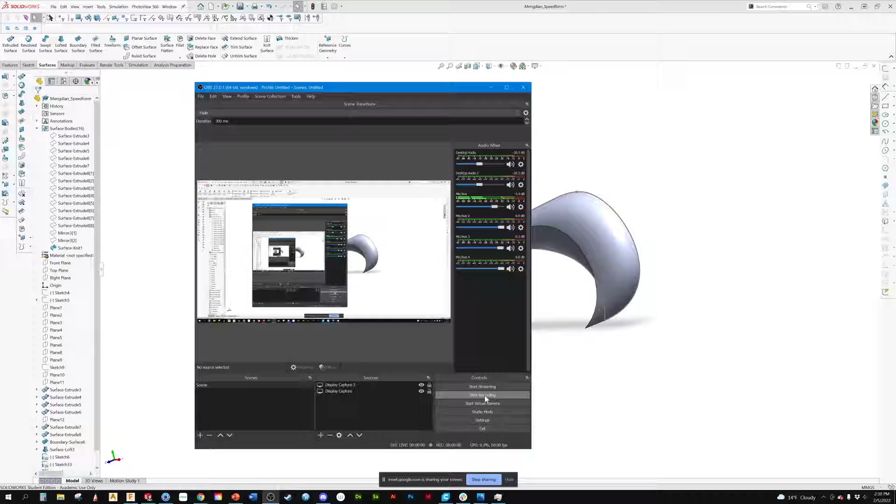There we go. Okay, so now let's mirror this over. There we go. Oh, did I stitch it when I mirrored it?

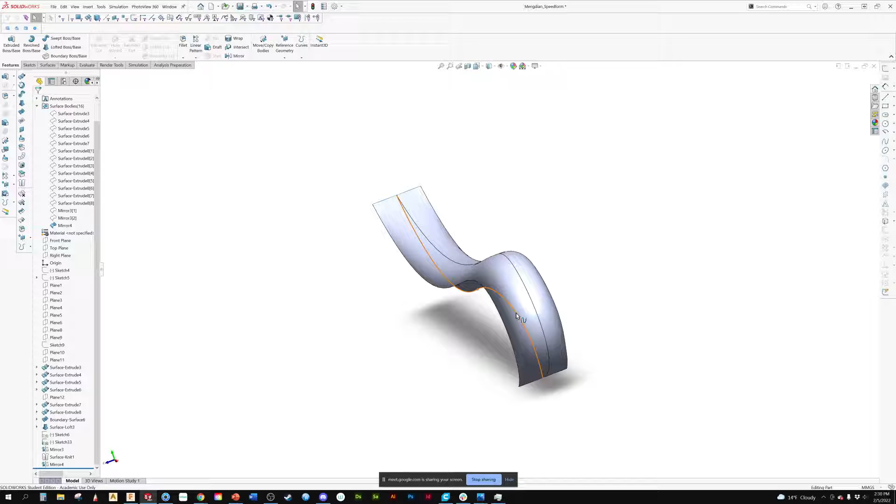Okay, let's hide this sketch. Let me just check to make sure something here.

Okay, so when we evaluate these, let me just go back to your mural board here.

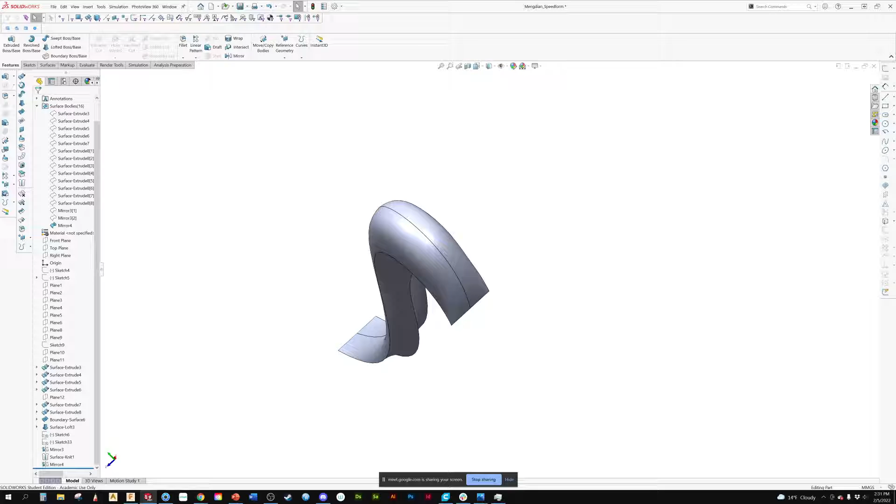So I'm going to ask you some questions of, did you want this? Is this what you expected? Okay, I think... well, no, let me go through the model first. That's what I'm going to do, is ask you some questions about that.

So first I'm going to just quickly hop into KeyShot, which I saw that you did, to kind of get a better understanding of the highlights. Let me put my glasses on here.

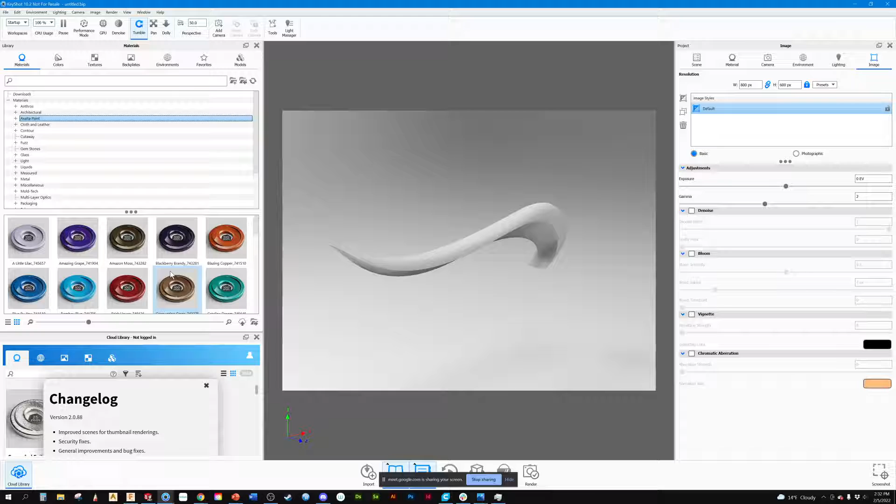Okay, so the very first thing I see, Megan, is that you did not set it up so that there's continuity. There's no tangency here. Did you notice that?

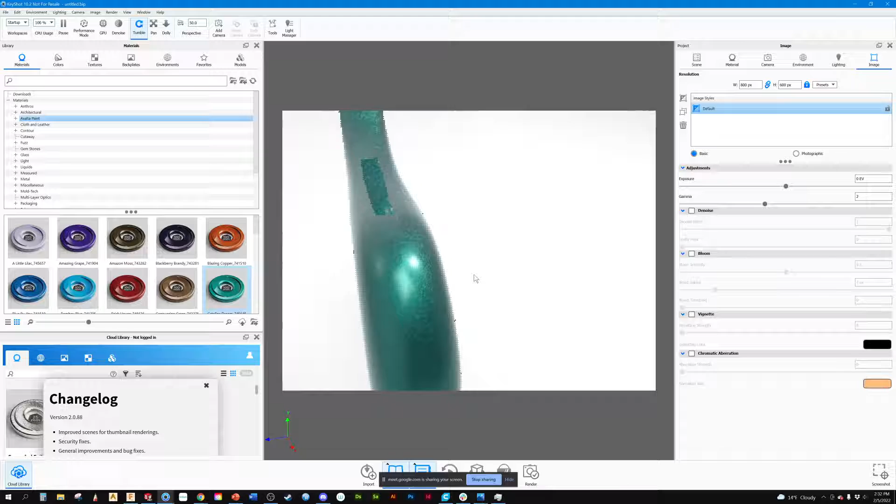No, because I didn't see that. Okay, so one of the first things that we talked about in the classes and even in the last video -- did you watch those two videos I sent? Yes. Okay, the advanced videos? Yep. So this is where attention to detail has to come in place, Megan.

You know, when you do modeling, you're missing that attention to detail. Yep. And the attention to detail comes in this.

So have you set yourself up with a tutor again? No, because I didn't find one. Okay, you've got to get a tutor set up or someone in class. If this continues, you're going to risk not getting a passing grade or getting the grades that you need.

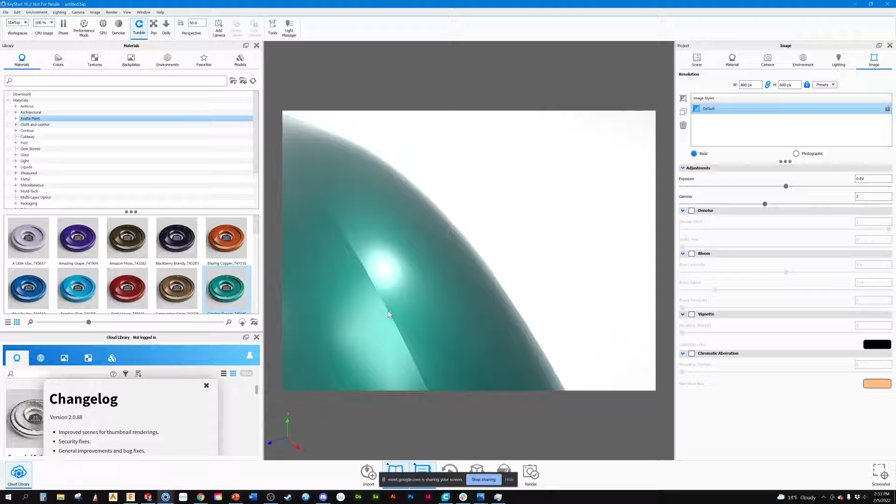Okay, so because I'm not going to harp on it too much, but from everything that we've taught, this is unacceptable. To ask me for help and not know that this was a problem means that you're not getting the information or you're not absorbing the learnings.

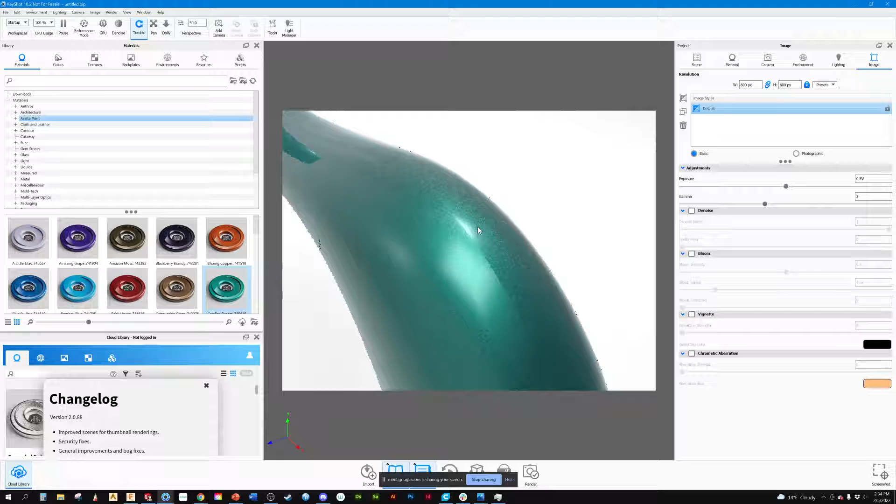Okay, so next, and we'll walk through some of how to fix this too, potentially. So now next, my question is, so hold on one second, so we don't have tangency up top, which we know. Is it just up the top area?

So it gets better towards the back, but you can still see it. Now, was your expectation that you would have a hard edge along the center here? Do you see what I'm talking about?

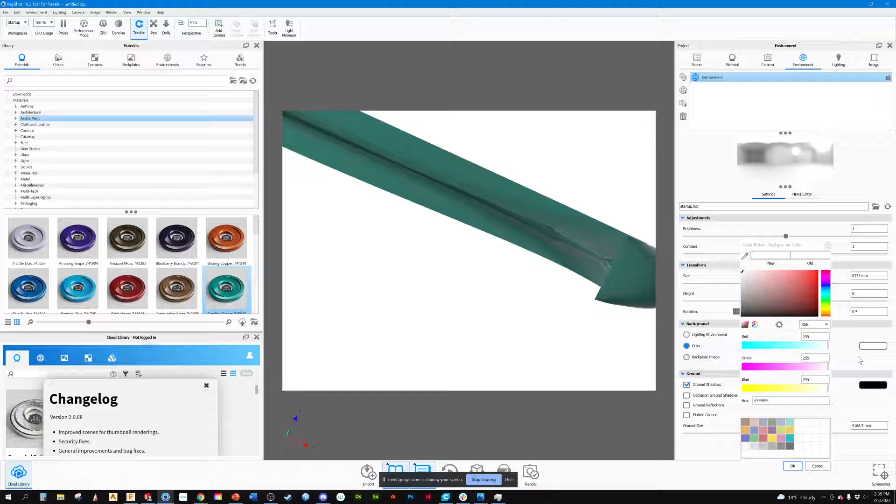Let me just go, I'm just going to change the background here. So that's a question I'm having for you, Megan. Did you want that kind of like razor edge? Was that what you were looking for?

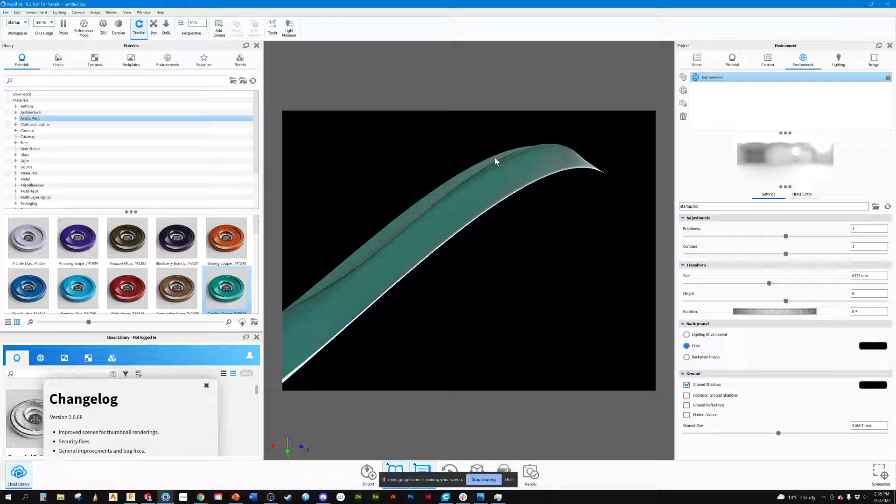So for -- wait, hang on. So I'm using two computers right now.

So for this one, it's like a mirror view, and what I want to do is just one side without the mirrors.

I'm not sure what you mean. So like for this one, you have the mirror view, and then for my final, I kind of want just the one side of the model, like the one I sent you. So you only want it as half?

Yeah. So that's not the assignment. It's got to be a full model, and it's got to be both halves. You know, because this, what you've got here...

And I would suggest that you be writing notes down. If I'm saying it needs to be a full model, you should be writing this down, Megan. Okay.

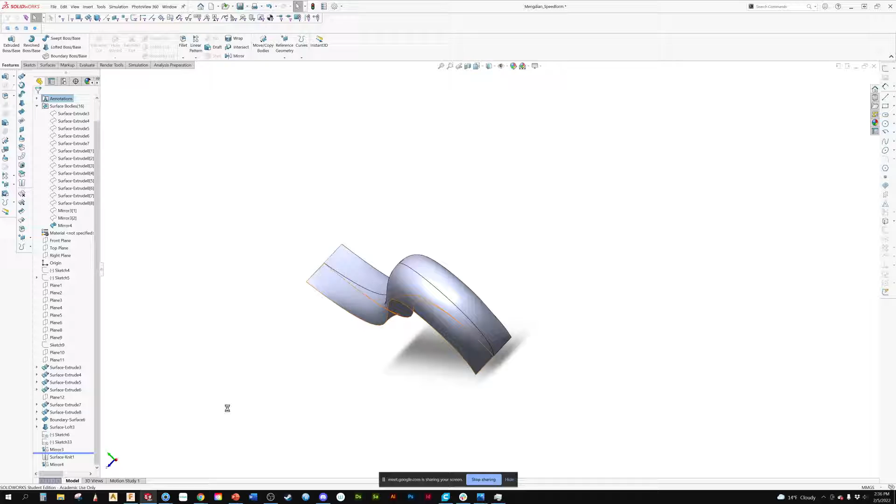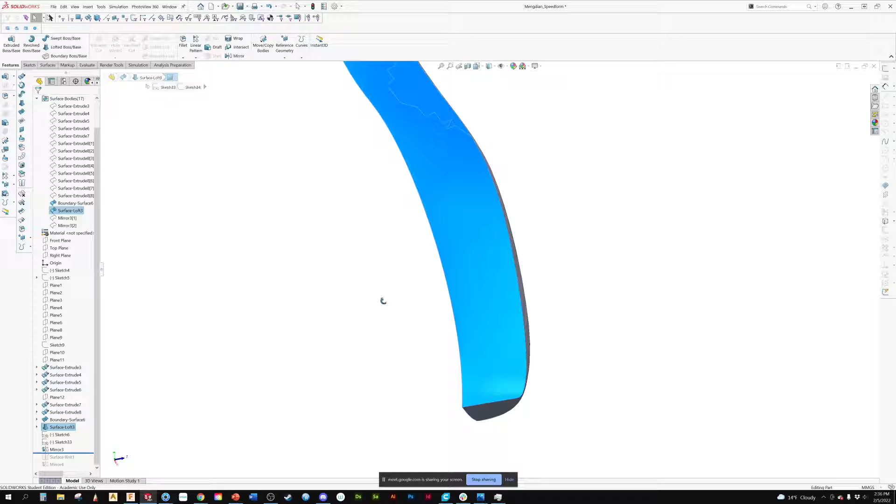Because if I look at this, if you were to submit this, it's not a solid. You can't do anything with this. Okay, so even then, my question is still going to be, see how this -- let me do this here. This will help.

Sorry, let me just find my way again here. Okay.

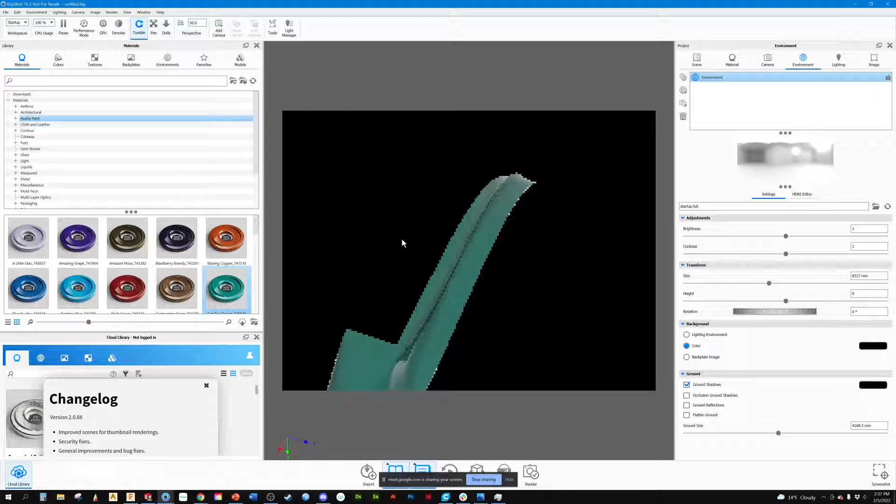So again, here, my question is still, did you want that to come to a flat edge? You know, it's basically, because when you mirror it over, it's a knife edge, which is what we're getting here. So the question is, when you modeled this up, is this what you envisioned? Is this what you expected?

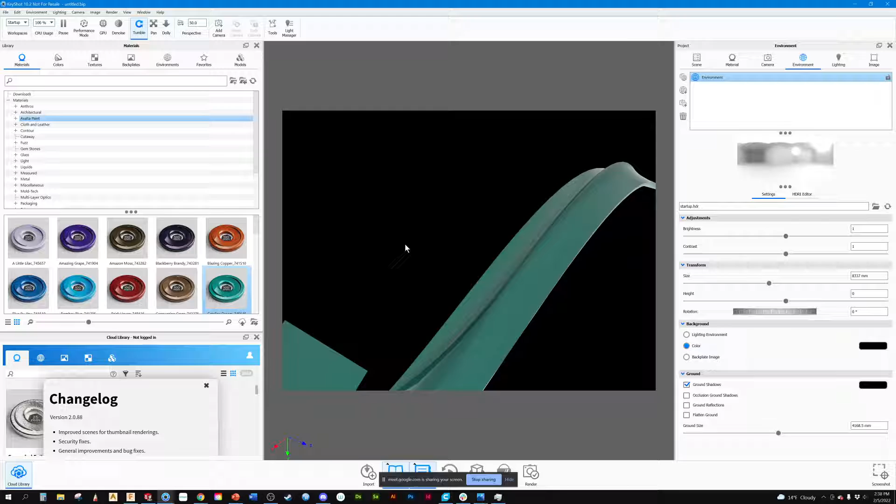Yes, because I don't want the bottom to be tangent. Okay, so that's then perfect. That's what I'm trying to get to. If that's what you want -- without it being tangent and just like a knife edge -- excellent. You know, because those are my questions. I don't know what your vision is.

Because my challenge was going to be if you didn't want that, then that should have been in your notes. Okay. Now you said -- let me just pull this back up here.

Oh, that image hasn't loaded. That's why there's a disconnect between two surfaces. I'm not sure why that's not loading up.

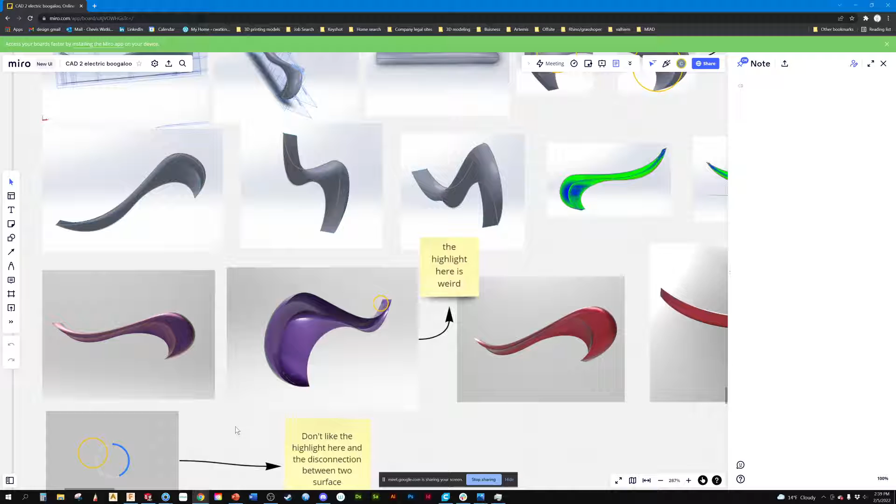So you're saying at the back the highlight is weird. So one of the things is, you know, it's weird, but what do you want it to look like? On the image board you've got to make sure it's something I can clearly see. If I zoom in on here, that's as close as I can zoom, and I can't see the highlight.

When we communicate this, a large part of this is getting everyone to understand how to clearly communicate, because there are going to be times where, as the designer, you may be telling another person who's going to model this up, 'here's your model, Megan, I modeled it up.' Your job is going to be to say, well, hold on, I don't like how this turned out, I'm not liking this highlight. So when I look at this, I'm not sure what highlight you mean.

Do you mean down here? Because I was using different materials, and the highlight I see is kind of different when I use different materials. The different material is not going to change the highlight, or the angle. So that's what I mean.

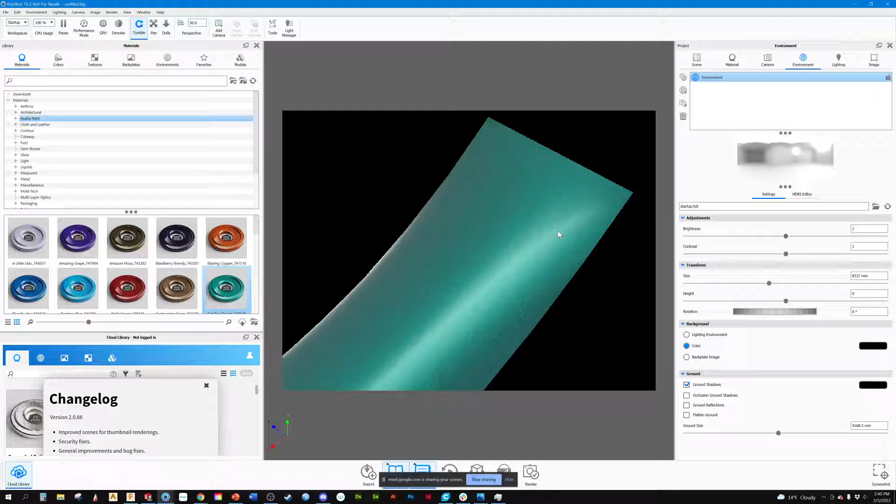You're going to need to send me a picture that shows me, like if it's in this area here, zooming in like that. Okay.

Shoot, I just lost my model. There we go. Zooming in like that, and then saying, you know, I don't like this, and drawing a line over it. Think about what would John do if he doesn't like your sketch. He'd probably draw on it and say it needs to be this, and you need to change that. This is part of this exercise - I know it's hard, but I'm not telling you guys how your form should be. It's for you to determine.

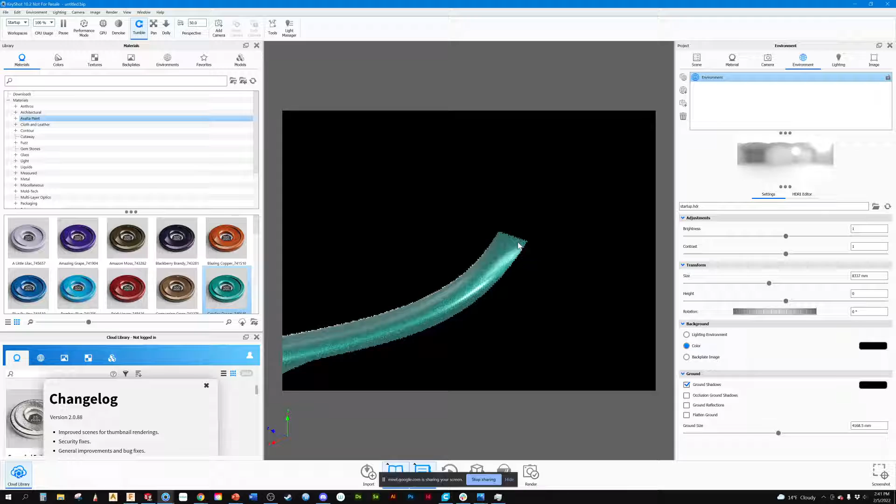Now, if I look at this, I like that highlight there. It comes down, it goes to the ball, and then it rolls back around. A lot of what's going on here is because your surface flattens out. That's why you lose that highlight. That's the natural shape of your surface.

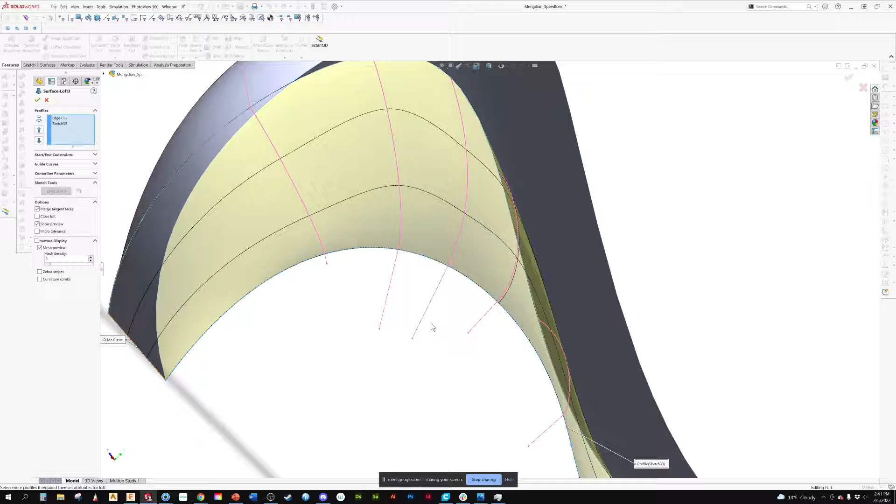So if you wanted this highlight here to go all the way down, this back edge - let's go back to SolidWorks - this back edge would have to have a roundness to it. It can't be perfectly knife sharp. Does that make sense? Yeah, okay.

So if I wanted it to be shaped like this, I could just say like this without changing the shape - this just looks more like my drawing. No, and that's fine.

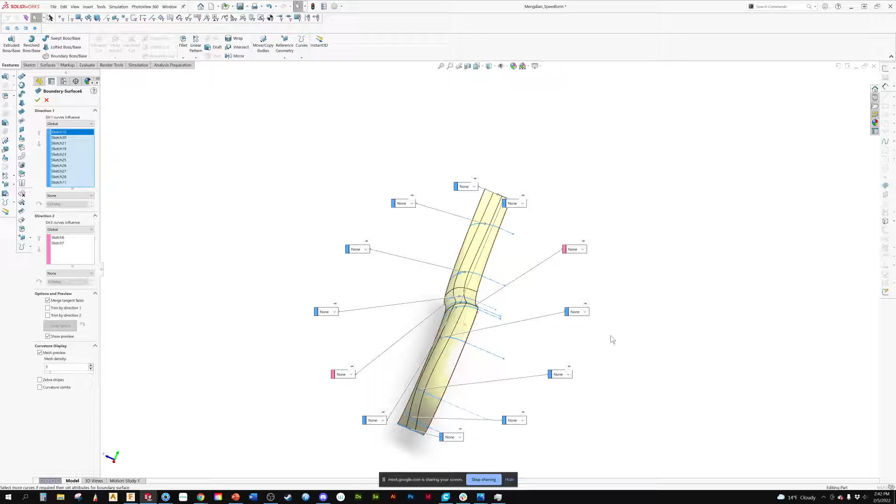It's one of those things - if it looks the way you want, awesome. But then sometimes it's like, but I don't want this highlight to do that. Well, that's the nature of your surface. That's where I was saying it can be tricky, because you can sketch something out and show a highlight on it in your sketch, but that highlight would never be real. That's what you see when you get it into your 3D model.

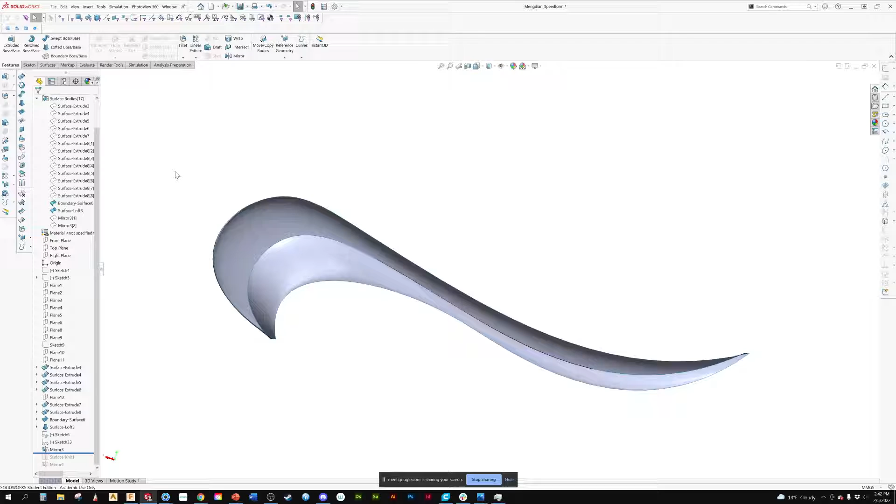So if you're going to want to change highlights down in this area, then what needs to happen is this sharp edge needs to go away. I'm not saying you have to change the highlights - it's up to you to determine, I like the way this looks, and I'm happy with it. Now let's take another look here.

So that highlight is weird. I still can't get this picture to upload for some reason. I think I sent it. Let me see if I can open it. Yeah, try to re-upload it.

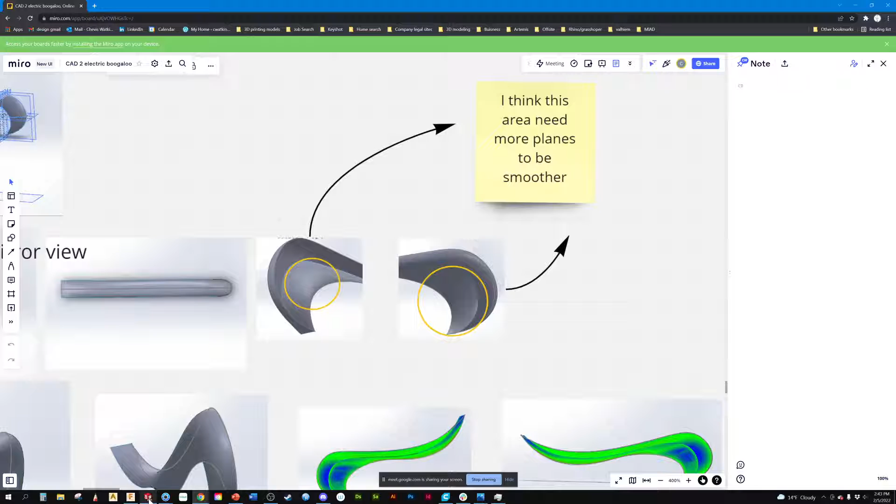Okay, so as you do that, you feel this area needs more planes to be smoother. Okay, so let us take a look at that section. That is at the front, correct? Yeah.

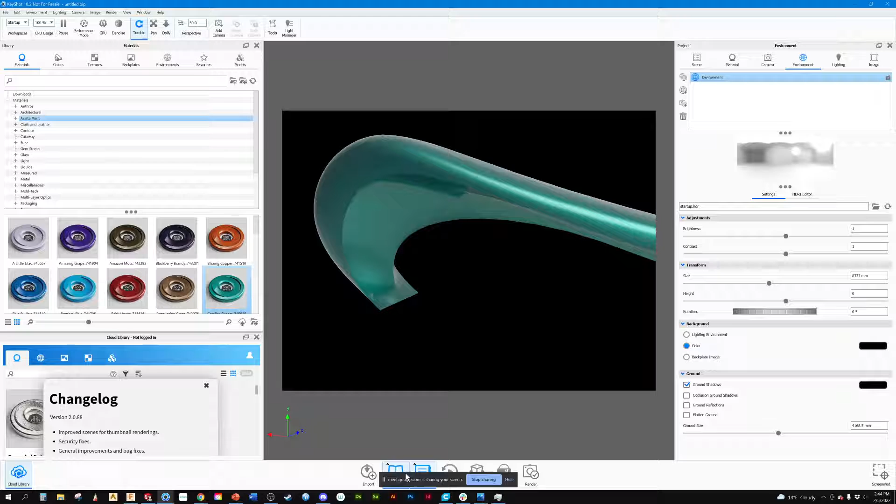So when you say smoother - I'm not, oh hold on, I'm not really seeing any. I'm just trying to see what isn't smooth here that you're not liking.

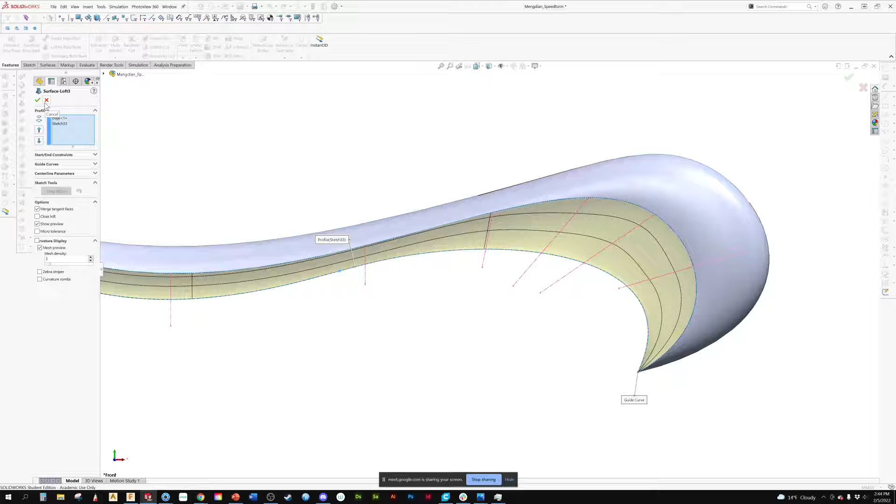Okay, so some of this - it's a good job on how you've started these curves, but some of this, in order to get this smoother, let me come back and find this here.

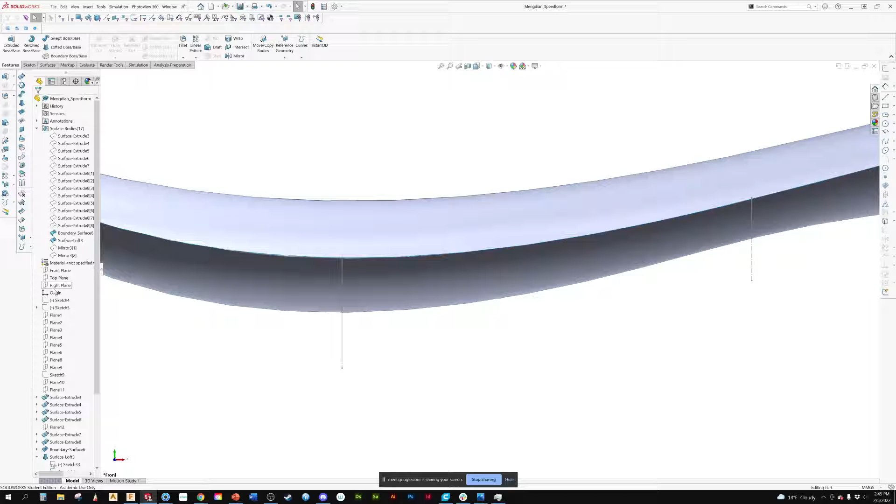So you did a good job of trying to wrap it around. And this one is great because you can see here how that's 90 degrees. Let me, you know what, let me just do this - so you can see how that's 90 degrees to that surface edge.

Okay, so when we do that, these ones aren't. You've got to try to find that middle balance. So even though, like this one here, most definitely, if I come in and edit this...

Okay, so if I was to come in and edit this, let's go to the right plane. What I would want is to try to get these - so if that's where that is, if I try to get that at 90 degrees, that's going to be more like that versus this. That's what's causing a little bit of your problem with the wobbles.

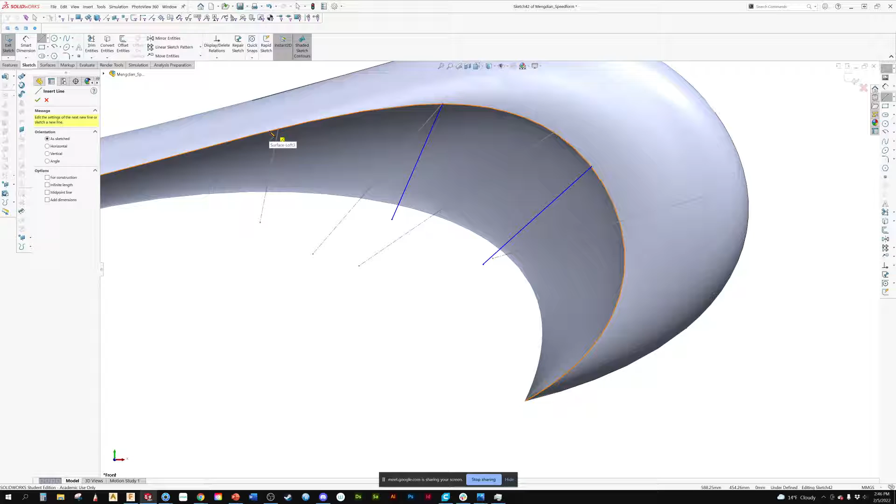Same as that there. You can see in your surface, the further we went around here, the worse things got. And that was because each one of these progressively gets further off alignment. Now this one, maybe we do that.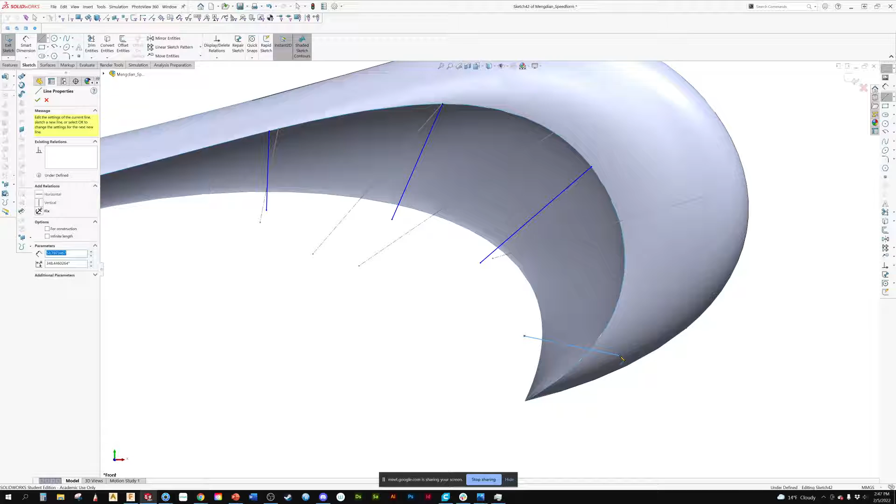So are you seeing what I'm referring to as these go around? These line curves would match that there. Does that make sense? Okay.

So now the next thing too is, and this is where - go back and re-watch the second video I gave you, okay? Because part of the problem is that I don't think - let me just go and see.

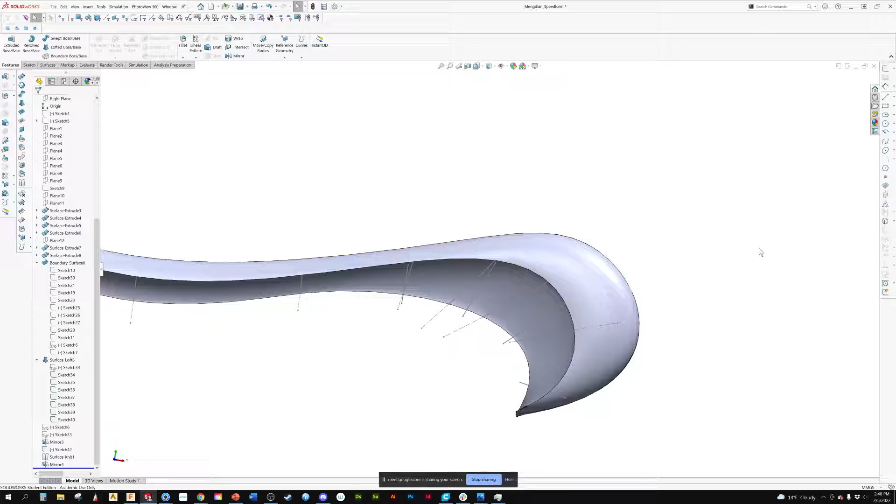When you're building this surface, okay... what happened to everything? There we go, I don't know what happened there. So there's, oh man, why is it doing that? Oh, I know why. No.

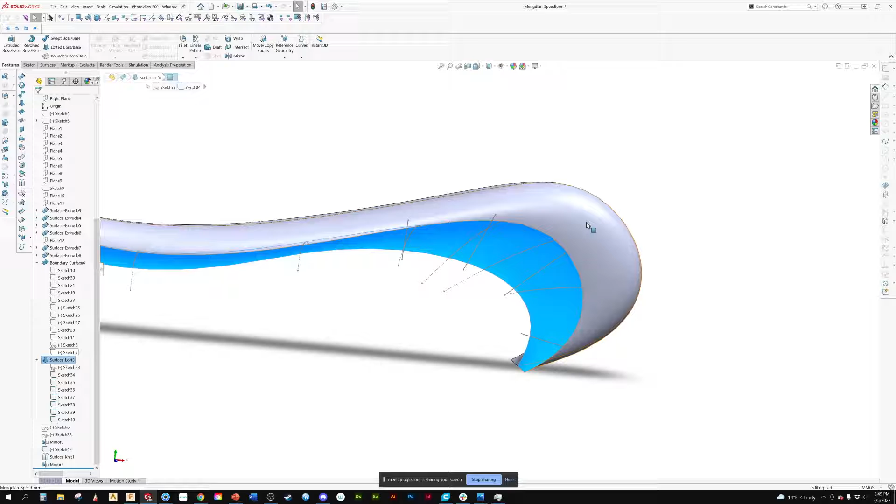So if we look at this surface, the way you built it, you didn't use this surface edge. So in that video, I had mentioned that you want to build off the edges when you can. So that's in the second video. So let me just show you what I mean.

So I'm going to delete this surface. I need to bring back... so yeah, so you did a good job with these. So you can actually just go back and change those lines to get the right angle.

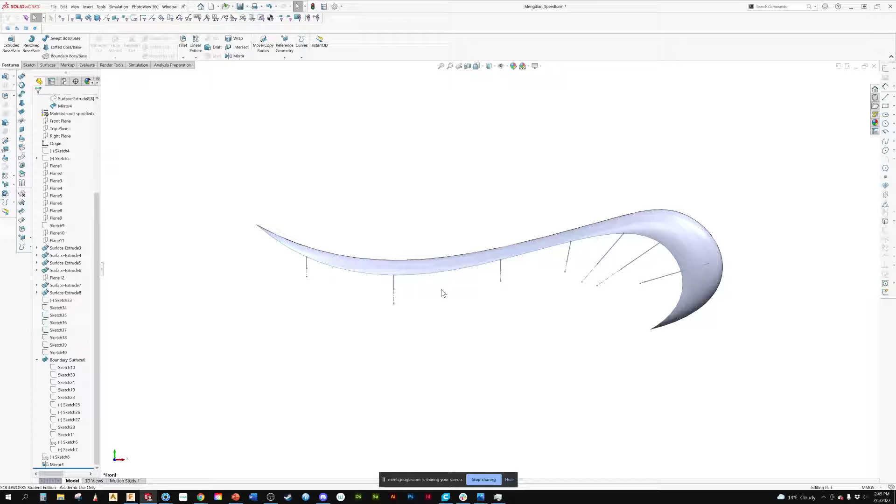I'm trying to find where that first original sketch was. So that's that one. There we go, there's that one. I'm not quite sure what one is the right one here, Megan.

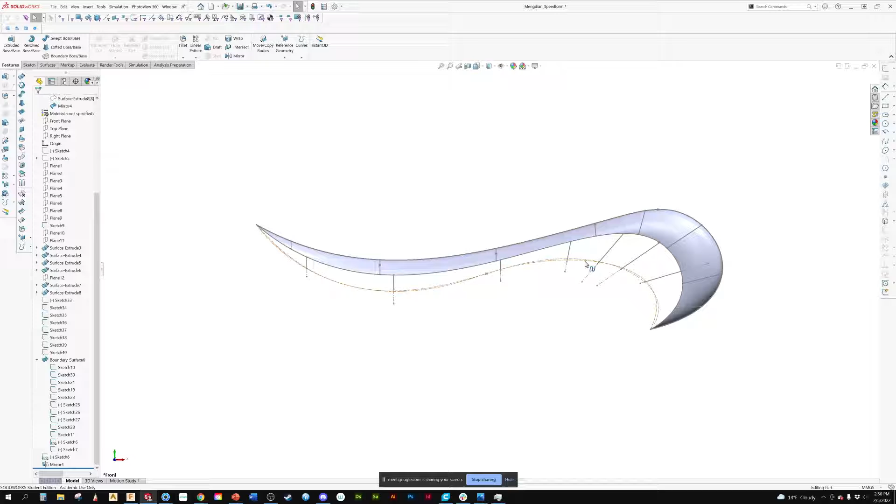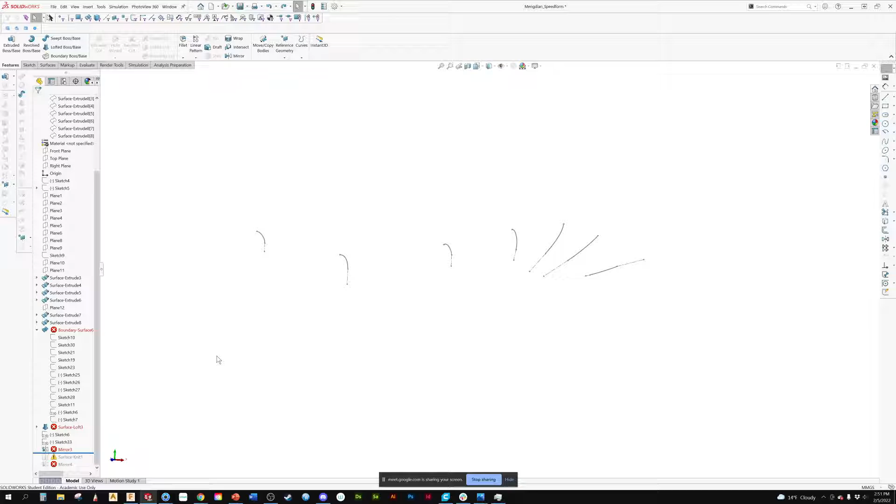Okay. Looks like that's the one. So let me just come back. Okay, I see what you did. Bear with me, I just have to go back through a few things because when I did that sketch, okay, I'm just going to reopen it.

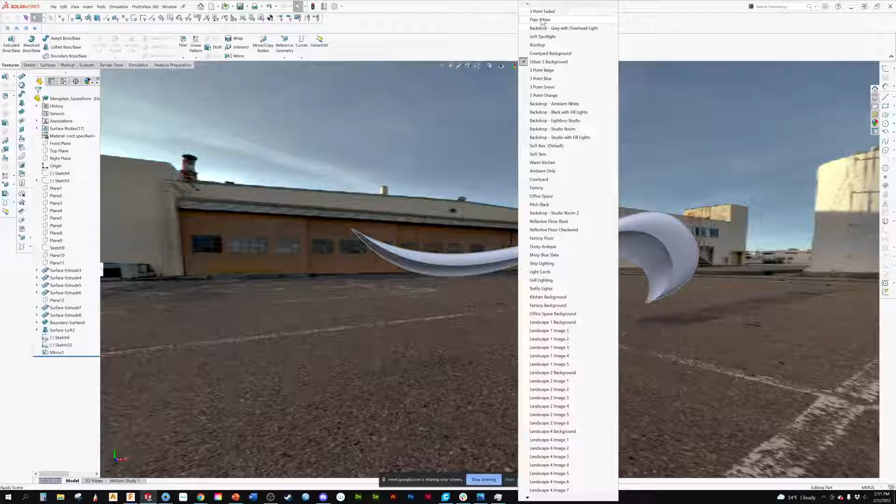Okay, so we've got the surface edge in here that you built. So what we wanted to do is... okay, so that's part of the problem, Megan. So you lofted it from here to here, but you didn't necessarily use any of the control points.

So as mentioned, I try to avoid using lofts. Because right now, you're just allowing it to go from this edge, along this edge, and whatever happens along this edge here is whatever happens, because you're not connecting it to anything. Does that make sense? Because I tried the other surface, the other way to build the surface, and then I don't know, it doesn't work. So I'm not sure why.

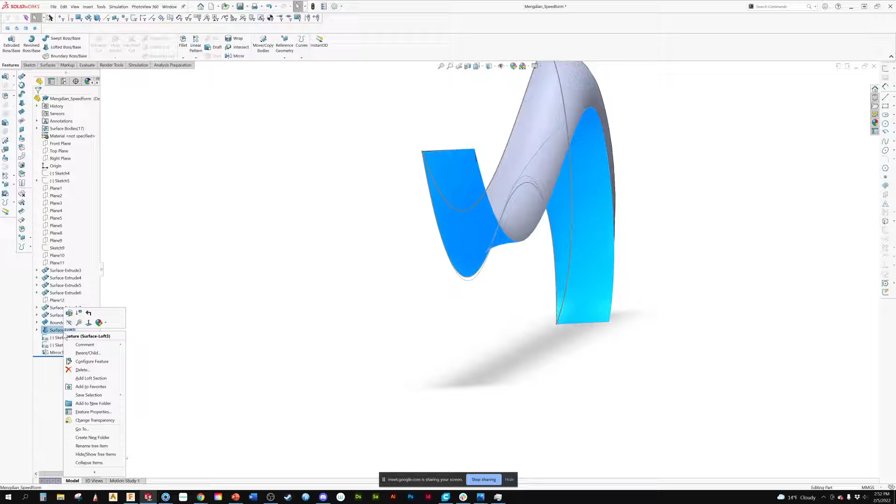Okay, so let's try this. We're going to delete this. Make sure, hopefully it doesn't mess everything up. Wait a second, hold on.

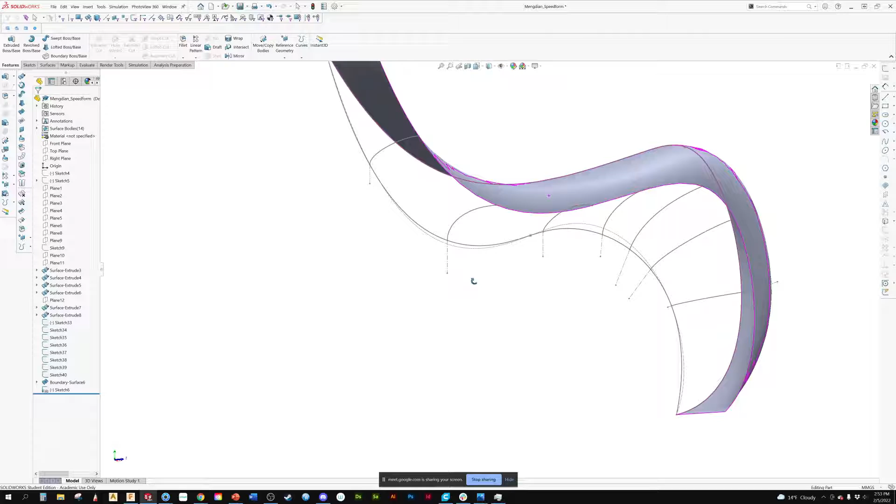Okay, so here's the thing. So you had all these curves in here. Did you use these when you made that surface? Yeah. Okay, so we're going to come back.

We're going to go back to our surfaces, and we're going to go boundary. And here's where we want to use that edge, okay? So it's always better to use the surface edge. Before, what you were doing was using a curve. So now we're going to come down here, go to this line here, and then we're going to use the direction curve. So we can come in and do all of these.

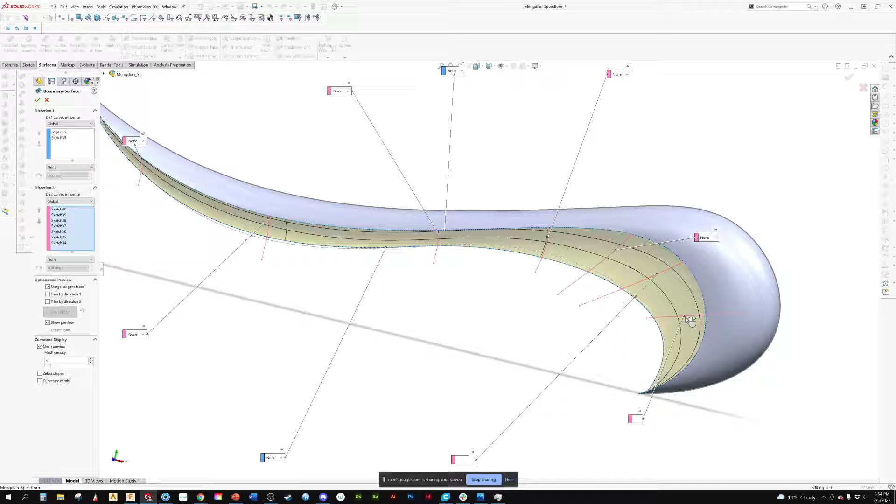And we're still going to get that little bit of lumpiness in there. And part of that is, I'll show you here, when we look at our curves, let me just turn these all on again. If I look at my curvature comb for that curve and we select this one, come on.

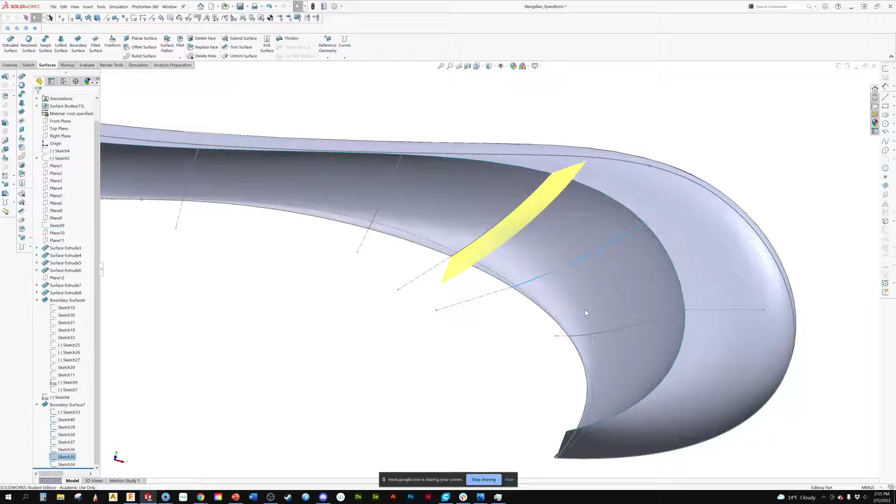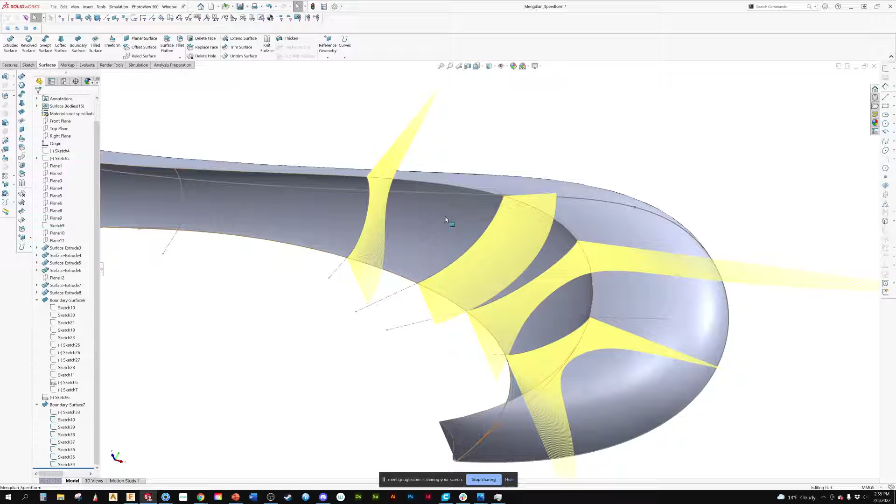See how this one has that perfect curve here, where this one goes quicker and fatter. And if I look at this one here, so what's happening is, if we look at, and then we go back to this, there's not necessarily a smooth transition from curve to curve to curve.

And again, it's not to say your surface is bad if that's what you wanted to do. If you were to try to get this to be a little bit smoother, what you would want to do is come in, let's edit that. And you can see just by pulling that in...

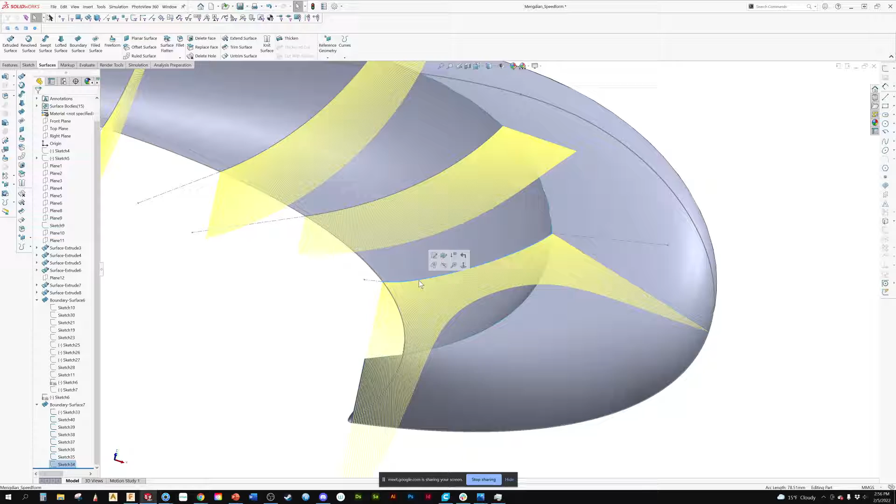Now again, if you felt like there was a wave in there, all I'm doing is cleaning up the curves to get rid of that wave and to get it smoother. If I'm doing what you want, or, oh, there we go, edit sketch. If it's giving you what you want, then we do this. But if it's one of those things where it's like, well, I don't like the way the highlights look now...

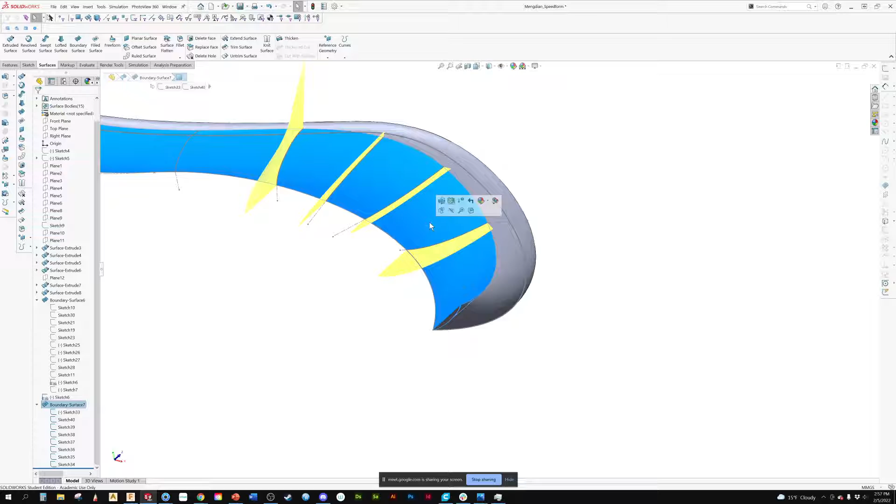So let's see if that actually changed that surface at all. What? There we go. So you can see down in here, it smoothed it out. But we've still got quite the large sweep on here.

Now, part of that... no, you didn't want tangency along here, right? You wanted that sharp edge? Yeah. Okay.

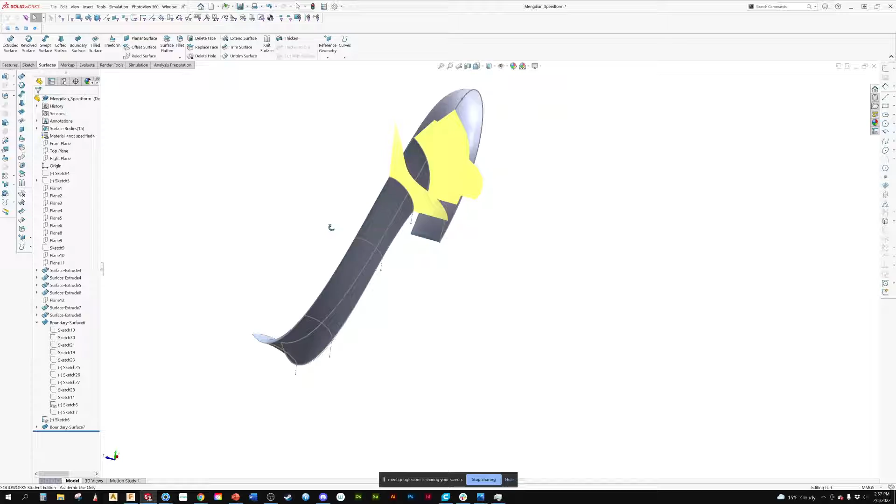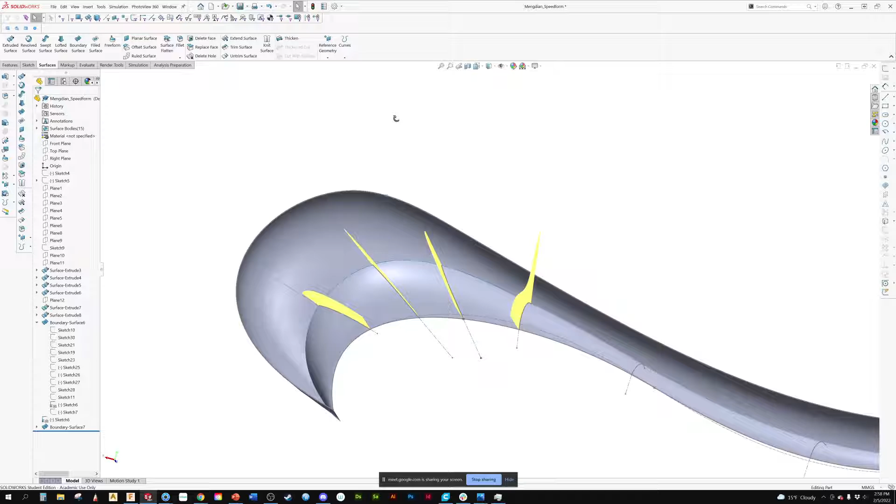So, I mean, really, what I see is, if I'm asking you to refine this, based on the things that you pointed out, I would get these curves so that they're in a better angle, like we just talked about. So this and this needs to be adjusted.

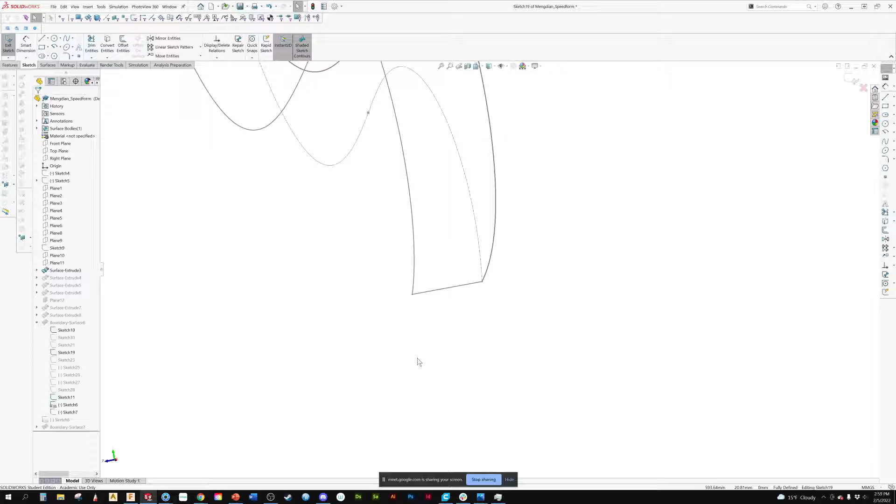The other thing is for this top surface, you've got to... what's going on there? Well, it says it is tangent. Yeah, I don't know why, like all my curves are tangents, and then the mirror surface is still like that.

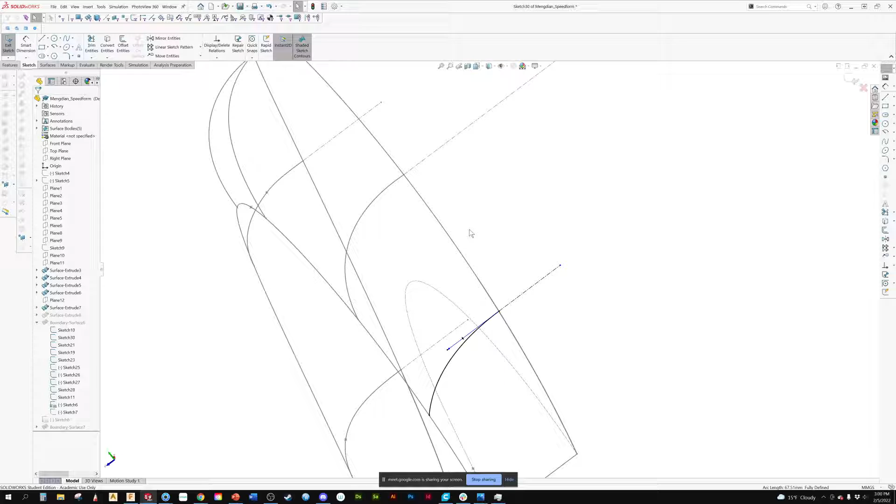Sorry, I'm just trying to find where your tangency goes wrong.

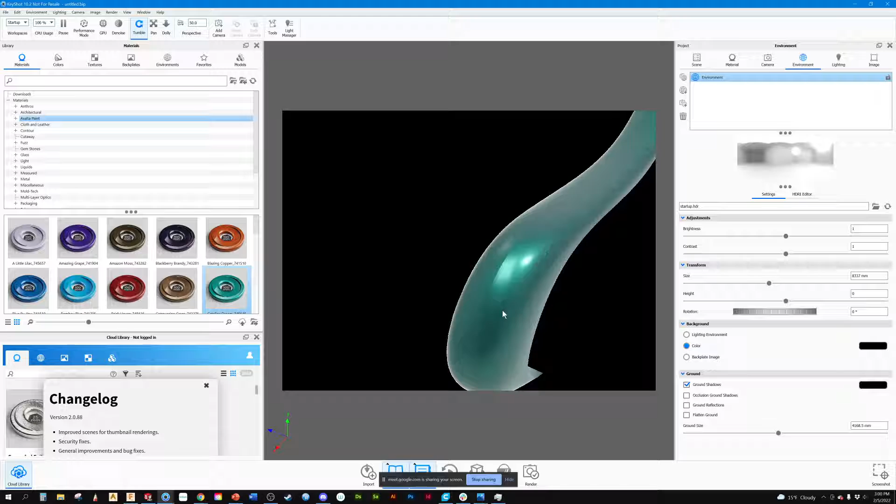Oh, no, so it peaks there. So it looks good there. So what I'm going to do is come back and mirror this over, because we want to see where it's not tangent. So let's go feature, mirror.

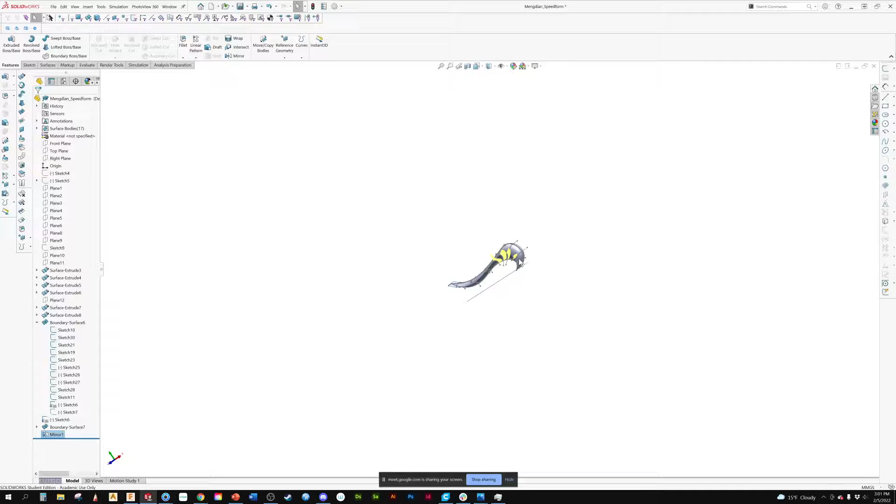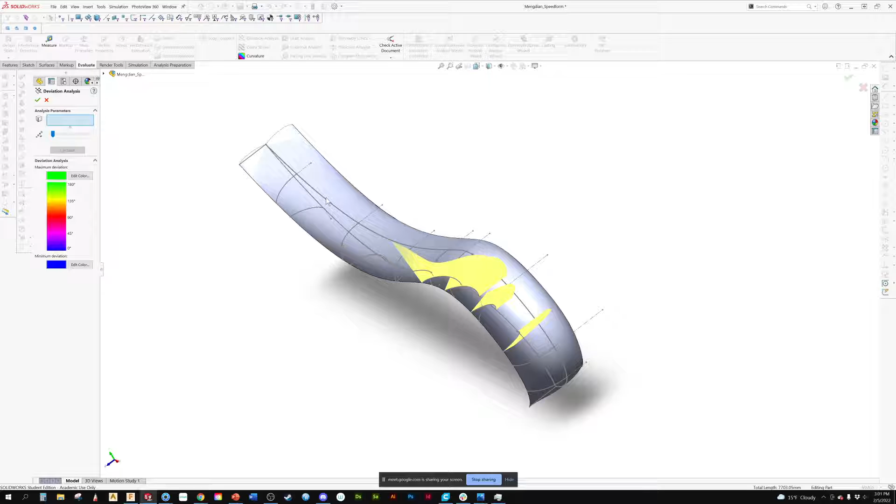So one way to see where the problem may be is by coming in and doing that evaluation tool. We're going to evaluate, and this is going to tell us where the angles are. So that's part of the problem there, that's not flat.

I think it's because you didn't select the edge. Oh, I didn't? No, I think it's the shared edge. Okay, but I didn't rebuild this surface.

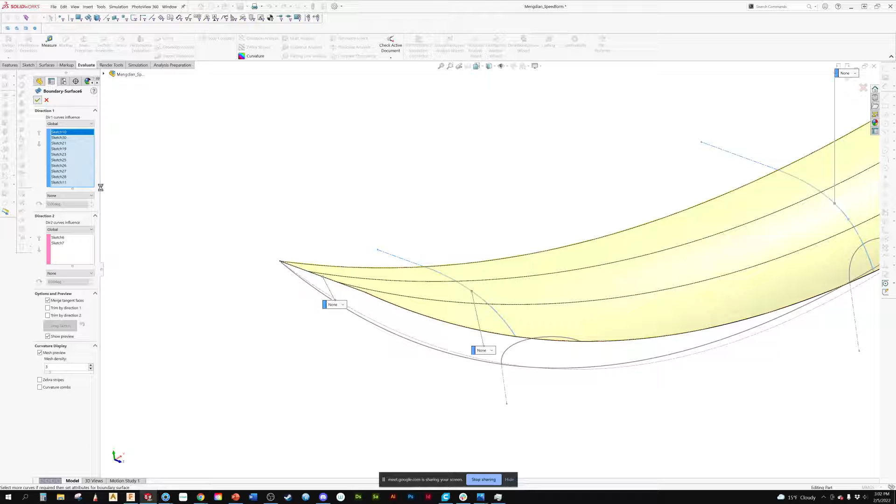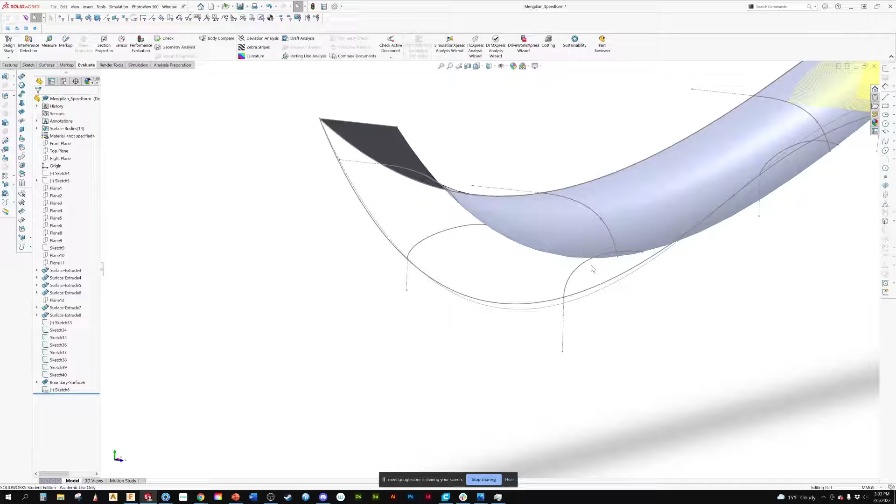Okay, let's do this again. So something else you might want to consider too, again, this is in the video, is sometimes it helps to build things off of edges when you loft them.

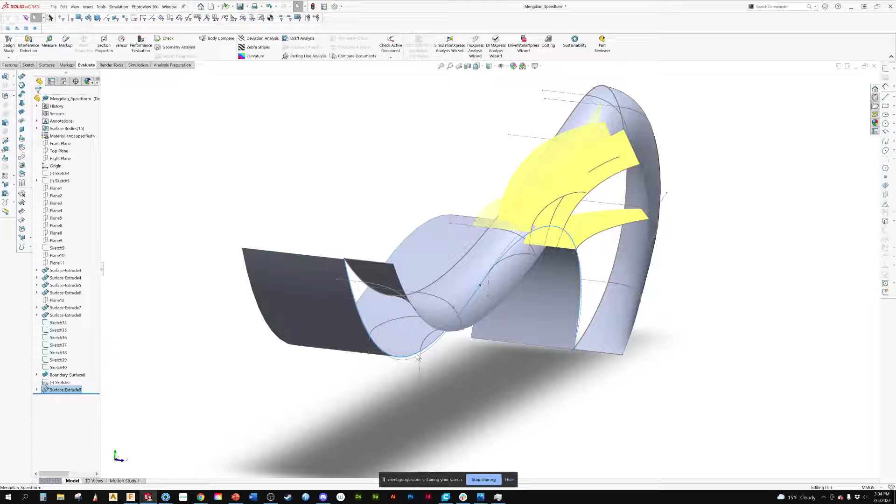So instead of using that curve, I extruded that curve, and now I'm going to use that edge to build it. Okay, so I don't want that because I want to make sure, oh, nope, that's not what I wanted to do.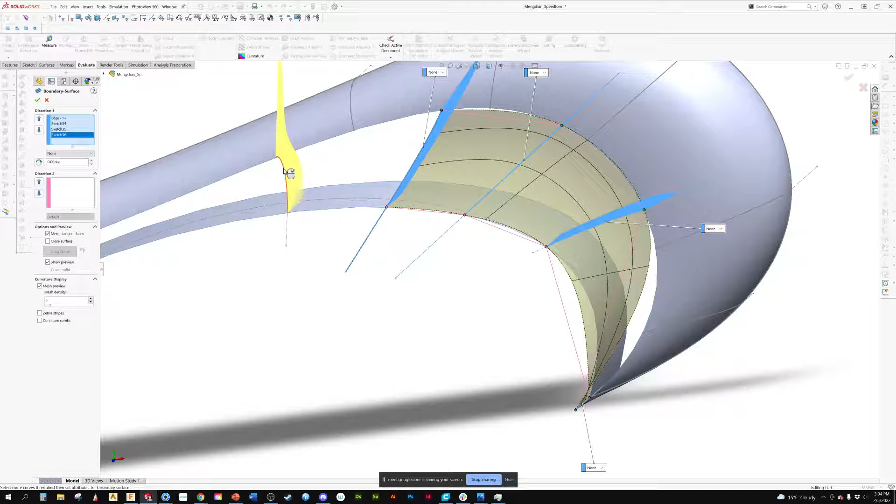Okay, so let's try this again now. We'll do our boundary surface. And I think once you get these lines straightened up, that will clean that up a lot.

This is what happened when I tried to build a surface, so I used the loft surface. Right, but unfortunately the loft surface wasn't giving you what you needed, or wasn't as good as you needed it to be. Yeah.

So that would have been one of the things to make in your notes, you know, what did you struggle with? You know, to say, hey, I tried to put a loft surface in here, but it wouldn't work. No.

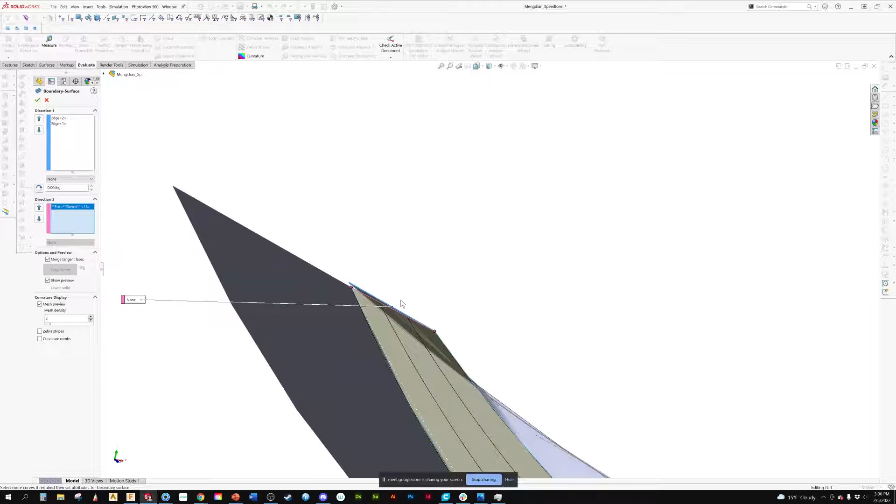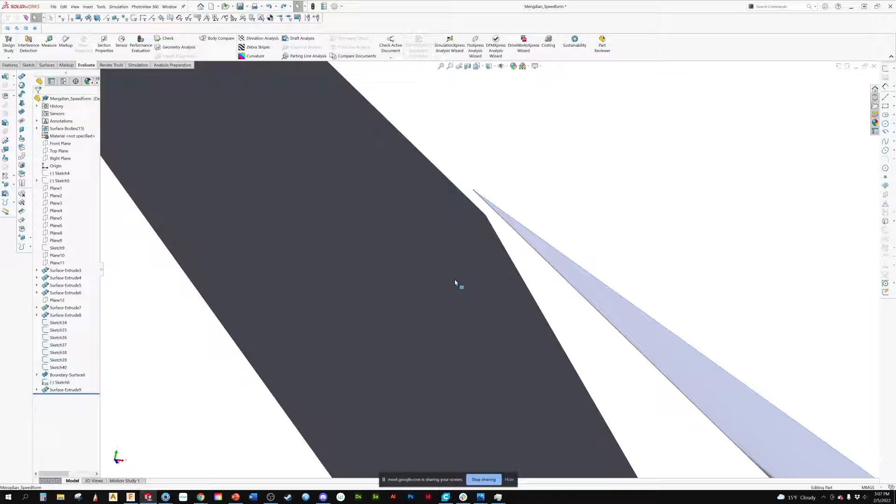I want that edge. Oh, so there's the problem, Megan. This surface, or this curve that you had, doesn't match up with this point.

So if I come back and I edit this, see that curve? Yeah. I see.

So again, usually if something doesn't work, it's something to do with, like if you can't get a surface in and it's giving you an error, more often than not it's your curves. Okay, so let's see if that works now.

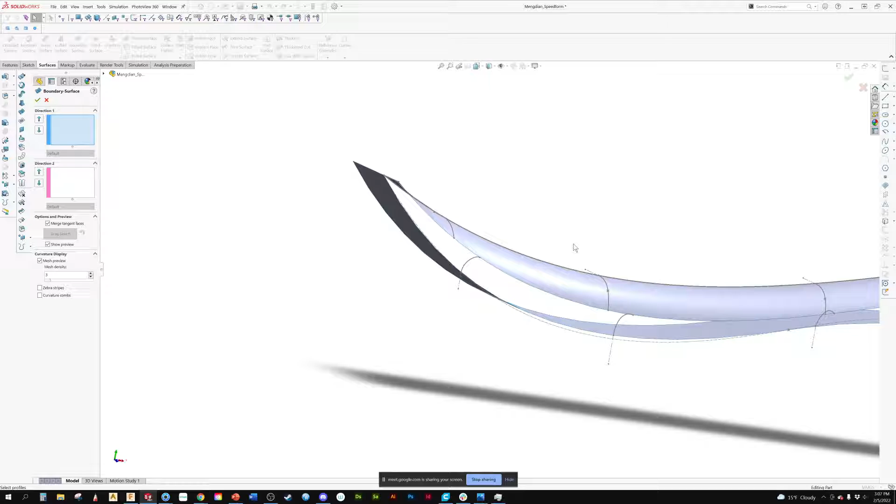If it doesn't work, I should have checked that surface first.

So now let's see if we get what we want. Ah!

I don't know why this is all of a sudden slowed down my machine too. There we go, so I was grabbing the sketch and not the surface edge.

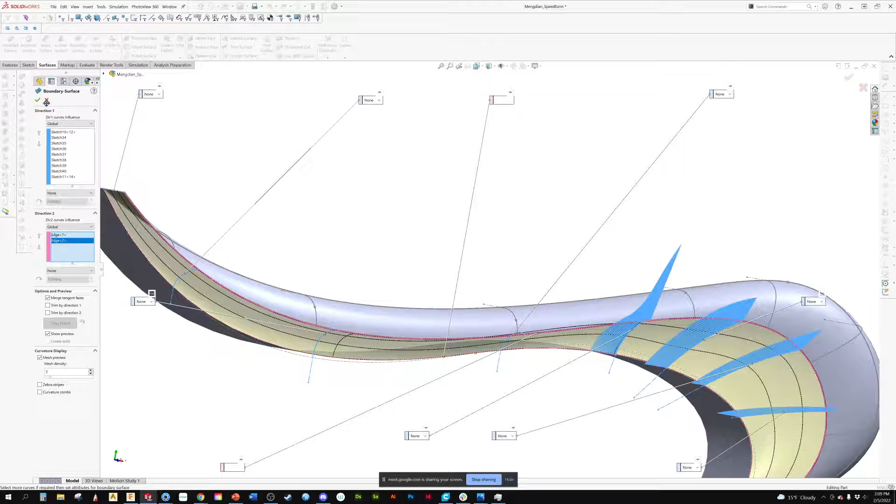Okay, so there, now we've got it in. Okay, so

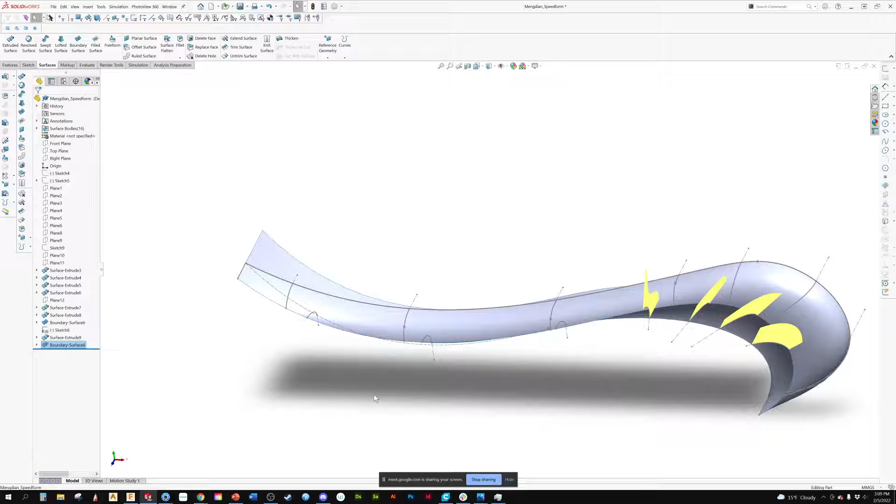That's what I would suggest that you work on, Megan, between now and Thursday, is fixing up the angle that these surfaces are at, or these curves are at, so that they get more consistent. So on the top you did a great job.

You know, you need to get that a little... this one here gets a little wonky, it should be more over here. This one really gets wonky, it should be more over here, like I was showing you. So you just need to fix those up a little bit, and that's going to help a lot.

And then, between now and Tuesday, work on trying to figure out why this is not being tangent.

Okay? Ask Pete if he's there. Ask, talk to Nathan, talk to Josh. Any of those three can probably give you some good guidance.

Okay? So right now I think they don't have any product design student tutoring, and this is what, when I asked them, and then they don't have any. So again, like last semester, you say, hey, I need to find, my professor will find a student to help tutor me.